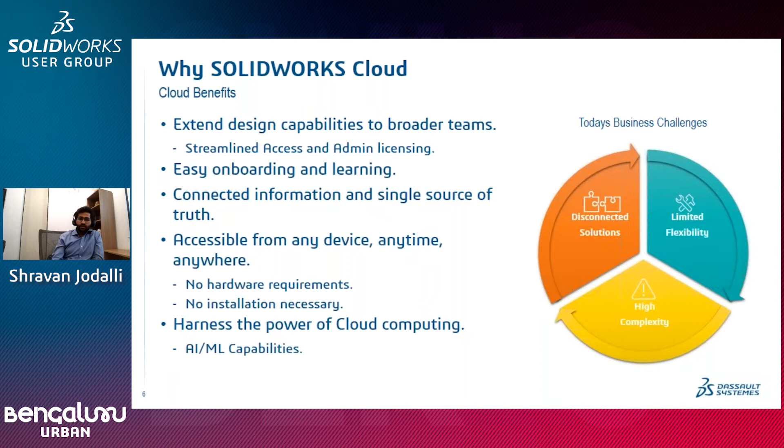So it's connected information and collaboration. Basically, you can use it on your office desktop, your laptop, your phone, your iPad. You're traveling and quickly want to give some approval — in a life cycle stage, somebody has sent you a design to review, so you can quickly go through it and review the design.

All right, let's jump into the demo. We'll look at the different applications that SolidWorks Cloud is offering. First we'll look at SolidWorks part modeling and assembly modeling, and then we'll look at structure modeling, sheet metal and drawings. This is the sea scooter model, where I want to create a battery enclosure. So let's start with the part modeling and assembly modeling.

All right, so this is the user interface. Let me exit the full screen. This is a Chrome browser, or you can use any other browser as well, where I have launched xDesign. So this is the user interface.

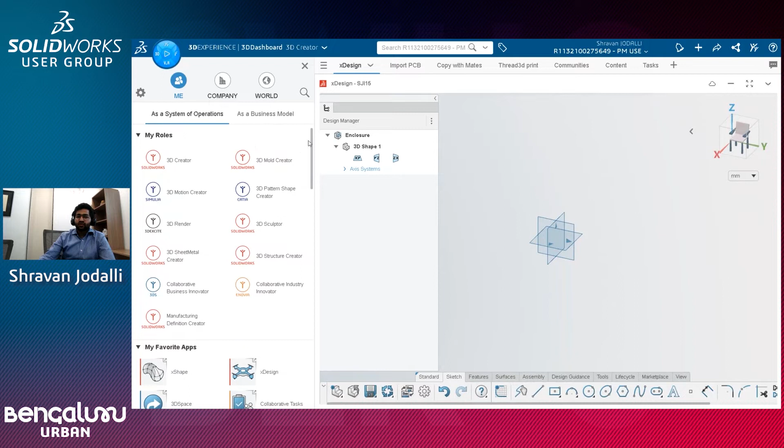You can also do a 3D search, and there's something called dashboards, where you can create your own dashboard. Like, I'm working on XDesign. Now I can add XDesign, drag and drop the application inside the XDesign tab, and based on my requirement I can add different requirements. And I spoke about collaborating.

In a design process, I want to post an idea. I've just created, for example, a community like SWUG Bengaluru event. Here, what I'm trying to showcase is a battery design for this sea scooter. This is my idea, and it can be viewed by everyone in the organization. If somebody likes it, they can change the state to a concept, and then once the design starts happening, you can communicate that in a much better way.

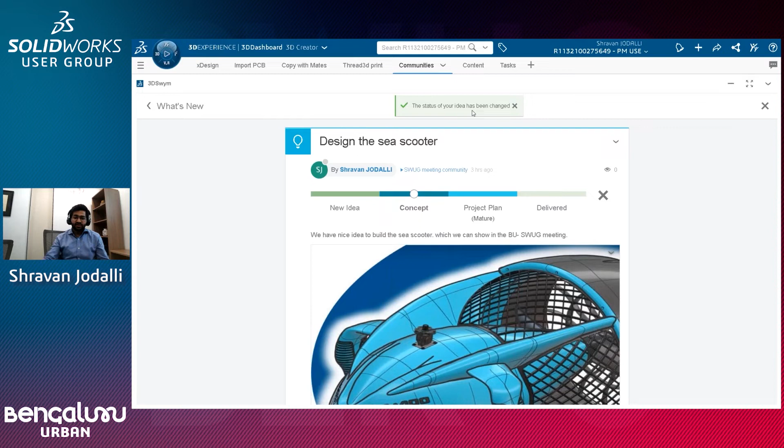These are also customizable - you can use all these applications inside your phone as well. Whatever is recently required, I can add those widgets, drag and drop them from here, and customize my dashboard. It's just showing.

I can also install this as an app, or open it in the browser as well. I can change the state - now it's in the concept state. So if your manager doesn't have a laptop all the time, he can just click on this, add some comments, and make a change. It's that simple.

Even the CAD modeling is all done on the phone. All this data gets saved in the collaborative 3D space, where your data is saved and managed. Your manager, or whoever is managing, can also set tasks. These are all managing applications where you can collaborate with your team.

So I want to create an enclosure design - is it in the to-do state or in work? They can assign it to you, all of this is done, and once it's completed, they can change the state of it.

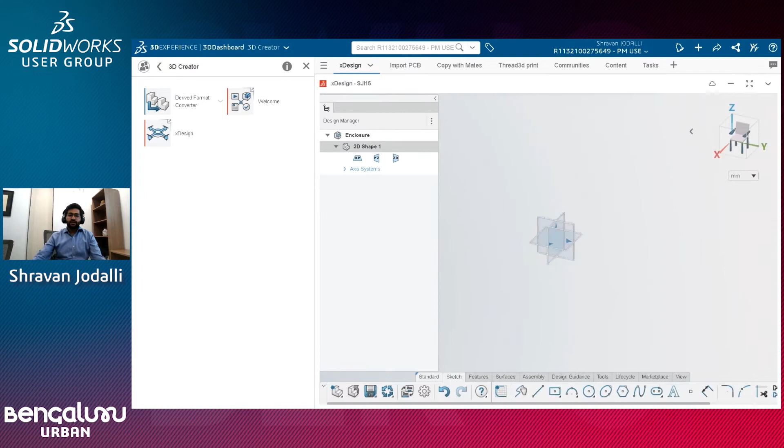Now let's go into the demo part of it. So this is the user interface for the designing, right? Here is my design manager tree, and here are my options. So let's start creating the sketch for the battery enclosure.

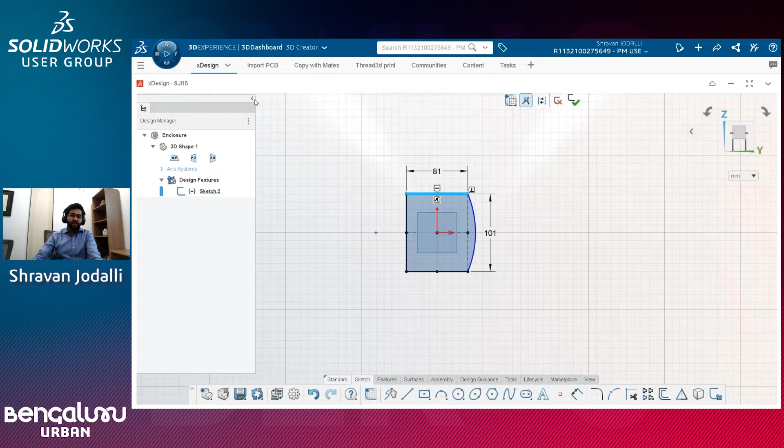When I start the sketch, it automatically activates the dimension, so I don't have to go out of the sketch in order to create dimensions. It's that simple. Editing any of the sketch entities is also very simple - if I want to convert this line into an arc, I can just do it through the context menu. I don't have to go inside the action bar; I can just collapse it. All right, let me do it on the other two sides as well.

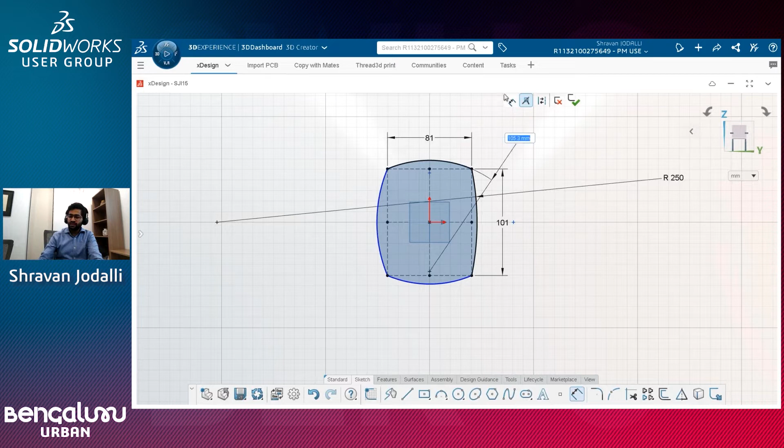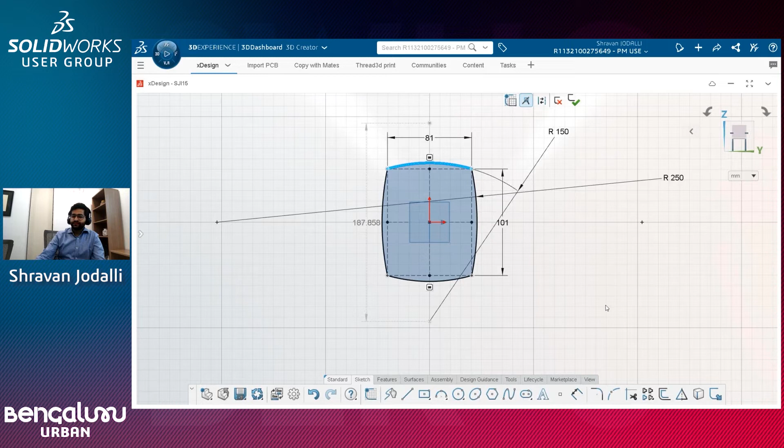Now I have this mouse gesture for the commonly used commands. I need a 250 radius. Commonly used commands can be based on the data, again we have added all those commonly used commands. Now when I select these two arcs, what all relations are possible with them? It will suggest me in the context menu.

So it is very simple and easy to use. I don't have to go out of this designing environment. Let me use the shortcut S key, basically the shortcut keys, where I want to create an extrude. Now I'll add the dimension. That is something which I missed.

Again I use the mouse gesture. Let me add the fillet. So again I have the lasso selection, so I just drag it all around, so I can create a fillet.

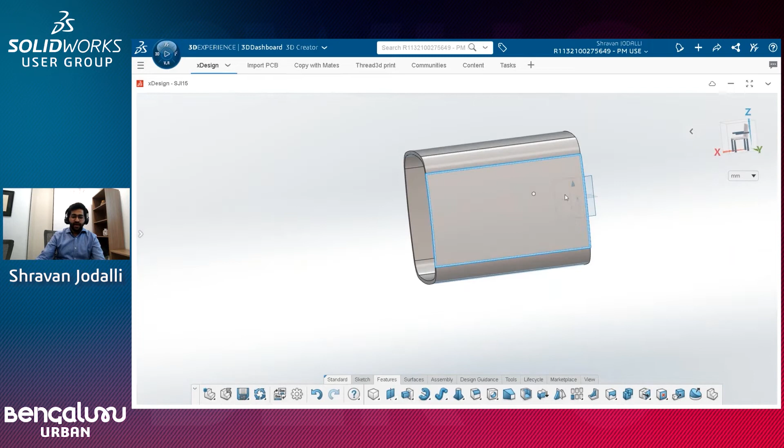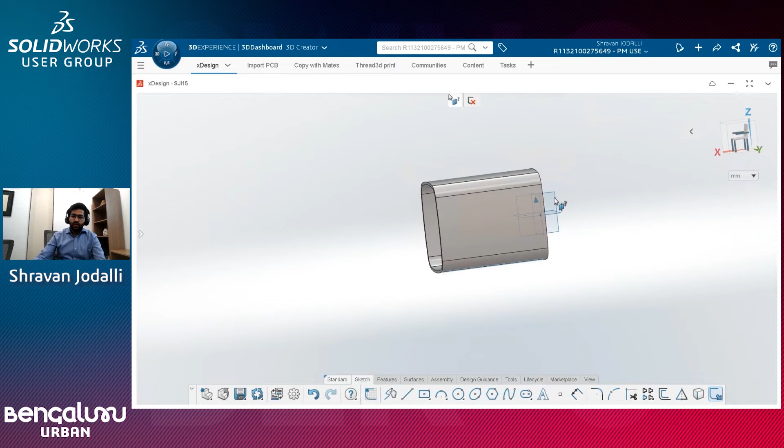Now let me create a shell, and I want the overall boundary of 3 mm thickness. In many designs, like standard libraries, if I'm taking a manifold as a design example, there may be a standard sketch a user might have saved in some particular file, and they want to reuse those sketches in their future design. So we have an option called insert sketch, which allows me to search from my database.

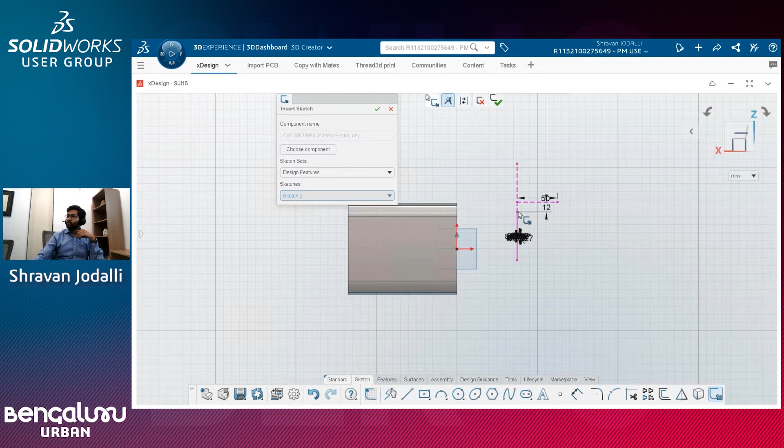And we have a 6W tagger as well, so it allows me to filter out and search the data quickly. So we import the sketch and we can select which sketch we want. We attach it to the mouse cursor, and it can easily snap onto any model vertex or any origin.

I want to insert one more sketch over here. I'll click insert and continue, so I can stay on the same dialog and in one go add more sketches to it. Now I'll click OK, and all the dimensions will also come in. You can see that there are dimensions that have come in. Now if this is a silhouette edge, I can still go ahead and give a collinear relation.

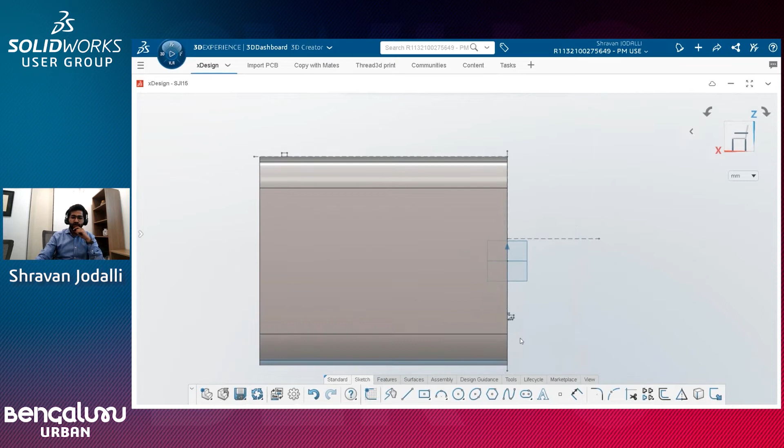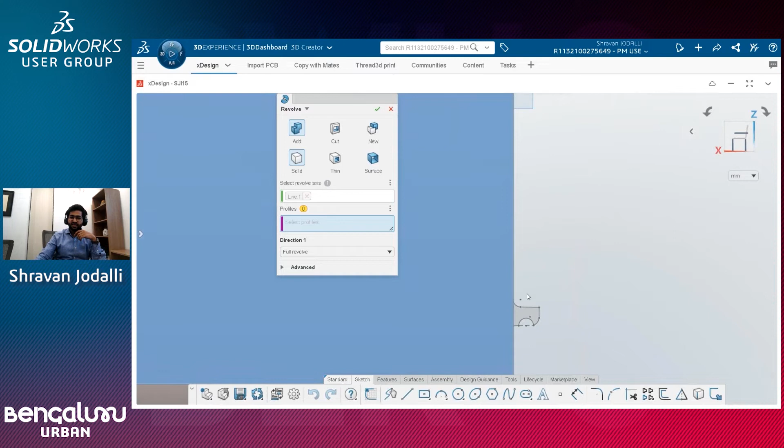I'll come out of the sketch now. In xDesign we call this a super feature. In this feature you can do an extrude, you can do a cutout, and you don't have to come out of this feature to do a revolve. I don't have to cancel out and go to a different feature. If I want to do a revolve, I just select this axis and select the sketch to add a revolve feature, and let me show this sketch here.

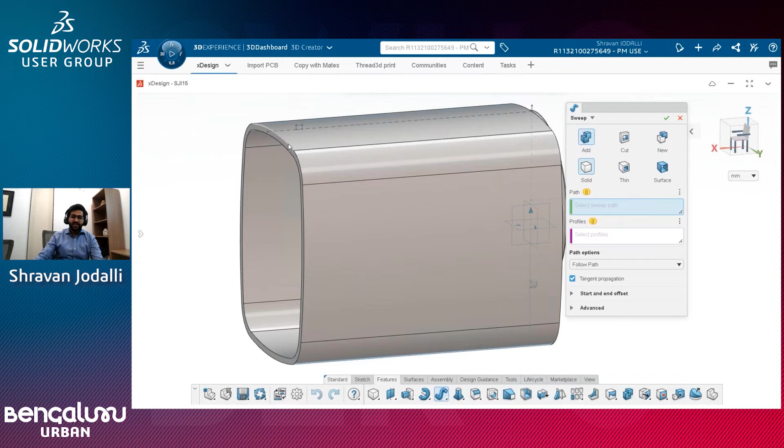Now I want to create a sweep. I need a path, so I want to sweep around the model to add a fixture. When I select that edge, it automatically pops up asking if I want to select the tangential selections around the model, right? So I select that, all the way around, and we were able to easily create the sweep.

Now this is a battery enclosure. In the end I want to mount a PCB, so I need to create some plugs to add the fasteners and the PCB.

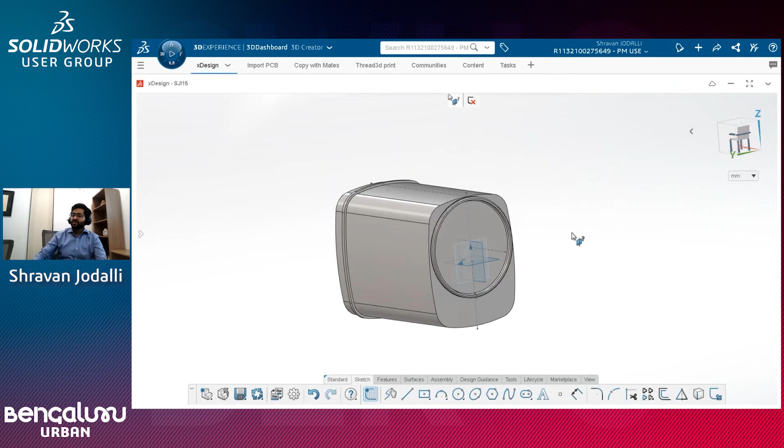Now I want to show you this. Suppose you have started an extrude command, but there is no sketch for you to select. So we have something called command parking. These three dots here, inside this we have a sketch command where you don't have to exit and start the sketch and then come back to extrude. So what we have done is smartly added a sketch command, because extrude needs a sketch to be added. We have added that in the command parking.

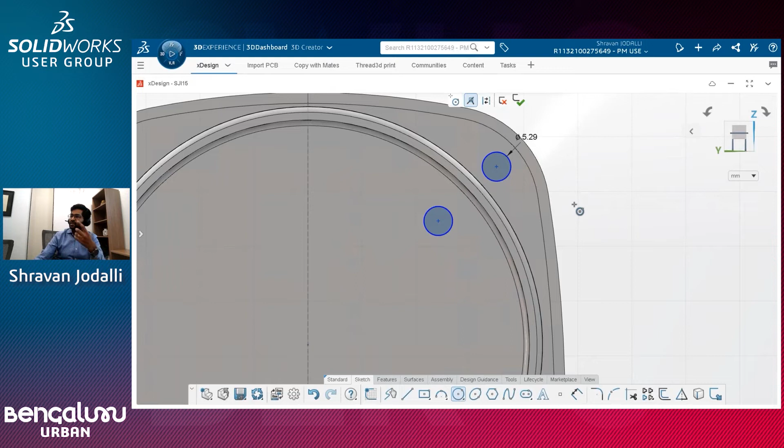So I'll add, and I want to create one more circle here. You can see there's a pink dotted line, and it basically reuses the dimension, the circle which you used from the previous one. So if you're creating repetitive designs with the same dimensions, you don't have to dimension it again and again, it uses the previous value.

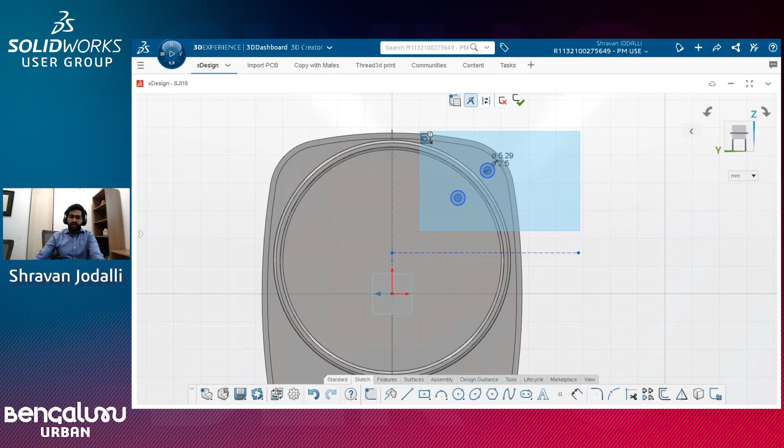Let me do the same thing, 2.5 here. And this we call a mode bar. Basically if I want to have the construction line, again I use the mouse gesture. The reason why I added this horizontal line, I'll tell you in a while. So I want these plug holes on the other side as well. Now this is where we make use of machine learning and artificial intelligence.

So we have something called the design assistance for the sketch.

When I click on that, it will give me the suggestion. The reason why I added this horizontal line was so it will also give me the suggestion on the other side. So do you want to go ahead and add this sketch on the other side as well? Now...

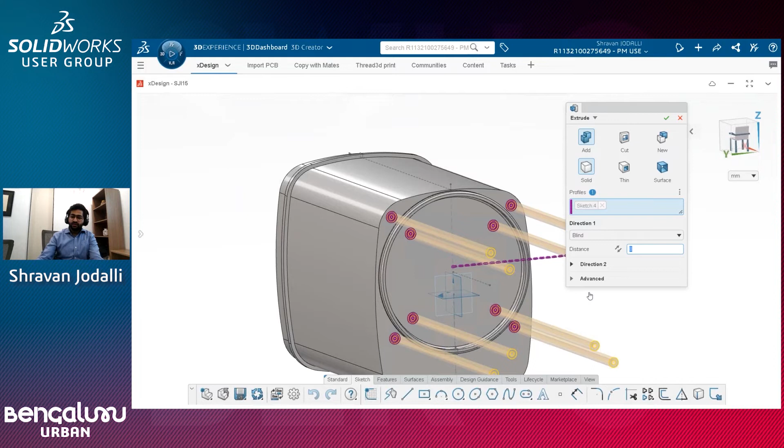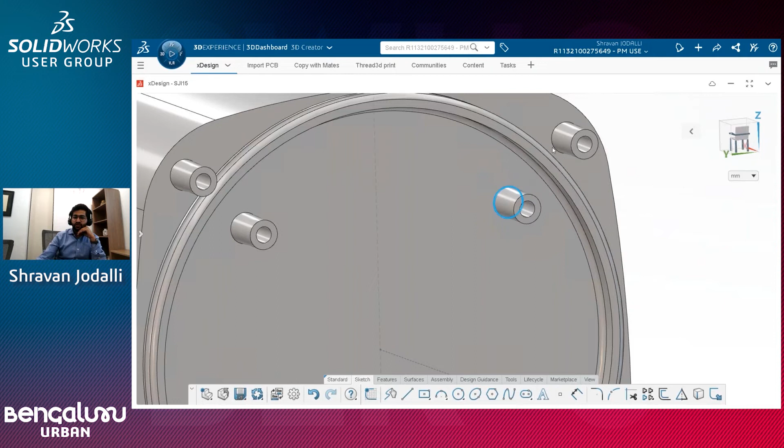I can quickly go and add 1 degree of draft. Again, when I select in the context menu, it gives me all possible options I can apply, so I want to add a fillet. I select this edge as well, and again it's a repetitive selection, so it pops up like a design assistant for selection. It helps me throughout my design process wherever there is a repetitive task, to minimize it as much as possible.

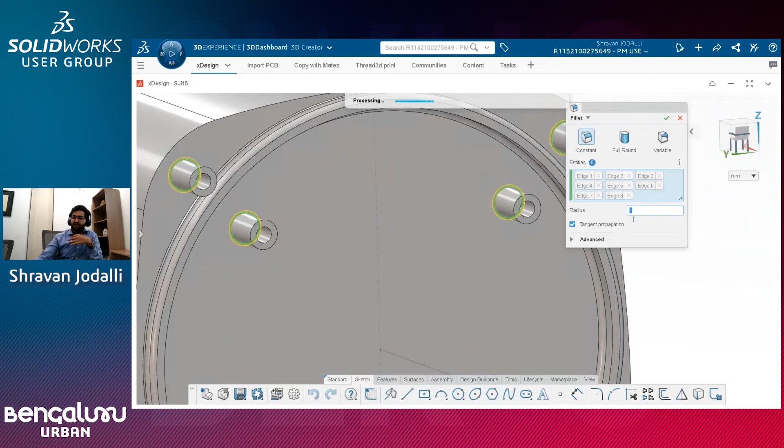So doing all these selections manually is basically a layman's job, going and picking each edge one by one. All this is taken care of by the powerful design assistants that we have.

Also, if I want to add extrude, you don't really need a sketch. You can just select multiple faces and start to add an extrude. I'll add the same thing again. Now I have a more completed version of the X. I've basically added more tabs so this demo goes much further, and you can use it in your own work as well. Let me quickly restore — there's a timeout, that's the reason.

Alright, so as this is available, we can jump into the next step. This is the battery design we did, and there's a motor that has been added to the design. Now there are cases where you cannot do a pattern — basically, some components you cannot pattern. So this I want to add here.

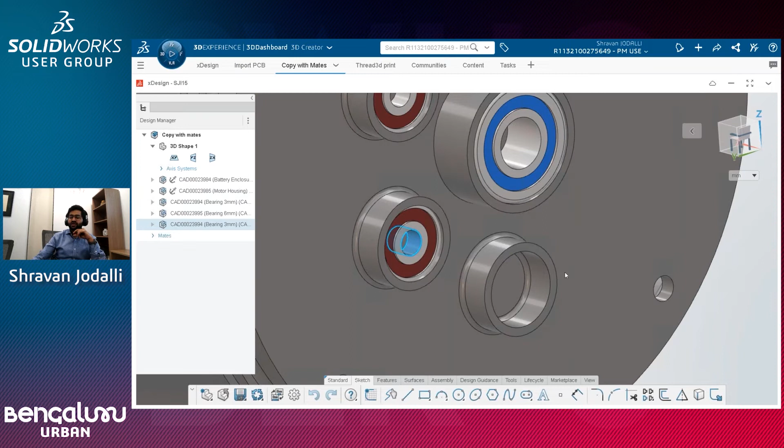Instead of manually going and adding all the assembly mates, let's look at some of the assembly capabilities we have. When I select a component, we have something called copy with mates. This helps me copy this component and add similar mates in a different location where I cannot pattern it because it's positioned differently. So I can reuse it.

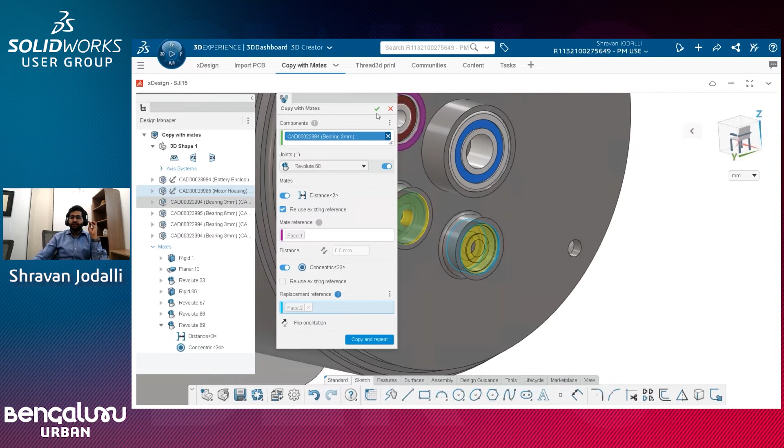It tells me, do you want to add a distance mate for this component? I just want to reuse the same existing reference from the older model. And here I want to select this as a concentric relation. You can repeat this process for other components, so you can easily copy the mates from a different model and add them here.

So now we have this component where I want to... There is an electronics engineer who has done the PCB design, and now I want to integrate it with the MCAD. How will I do it?

We have a capability where you can import IDF 3.0 files, and all these file types are supported — you can import STEP, CAD-CAE files, SolidWorks, ANSYS, IGS, mesh files, Parasolid, and STEP. Now I want to import an IDF file, which is an EMN, BRD, all of that. You can also import the file if you received it from a vendor, either from disk or if it's saved on the 3D drive, you can choose from there as well.

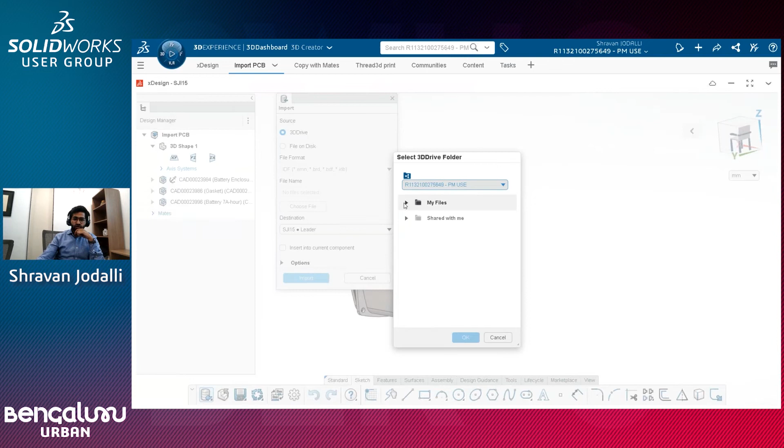I'll pick up the PCB6 EMN file. Automatically, if the file is in the 3D drive, it will also pick up the EMP along with it, which has the information about the height and outline of the component and where exactly it has to be saved.

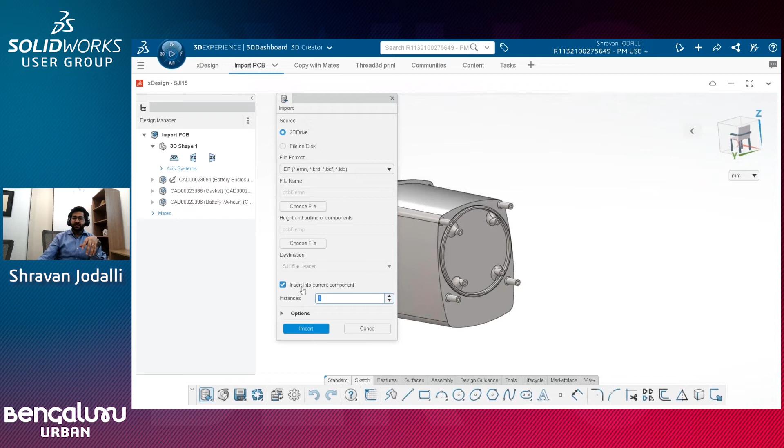There's a common space where all your data is managed. You can select which common space to save this in, and whether you want to import and open the file, or if you're working on some active assembly and want that PCB file inserted into this particular file. It asks how many instances you want to import — I can just check this box, insert into the current component, which will import and insert it into the existing model.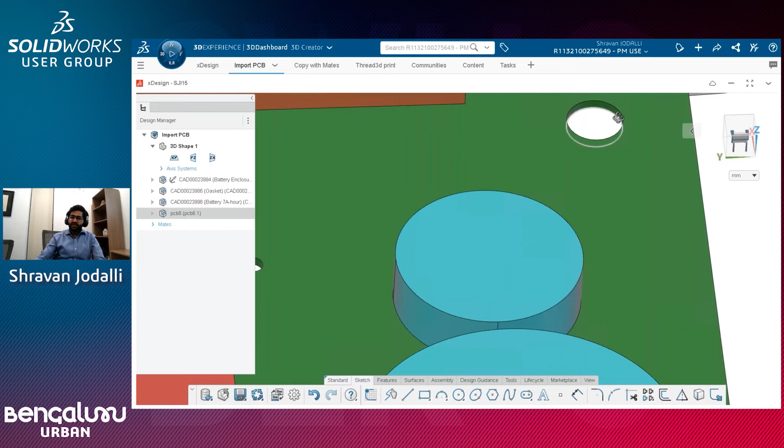So you can see that the PCB file has been imported in this active model itself. I'll just use the robot to pull this out. Again, you can easily add the assembly relations with control select, and it will suggest what all relations are possible.

Possibly you can give it to two circles basically. Now I'm not happy with the orientation of it, so I can click here. I don't have to go into edit, so I can flip the mates that I have given.

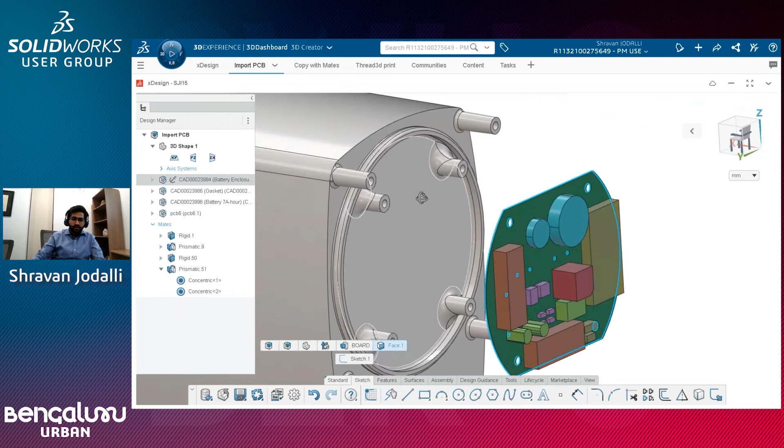Now I want to apply the same concentric relation between this and this. And I want to mount this PCB, this face, with a coincident relation.

So again, in assembly mates, we have gear mates, and there are advanced mates as well available, rack and pinion and cable joint. So all these mates are also available. So even the assembly modeling and the part modeling are pretty much taken care of.

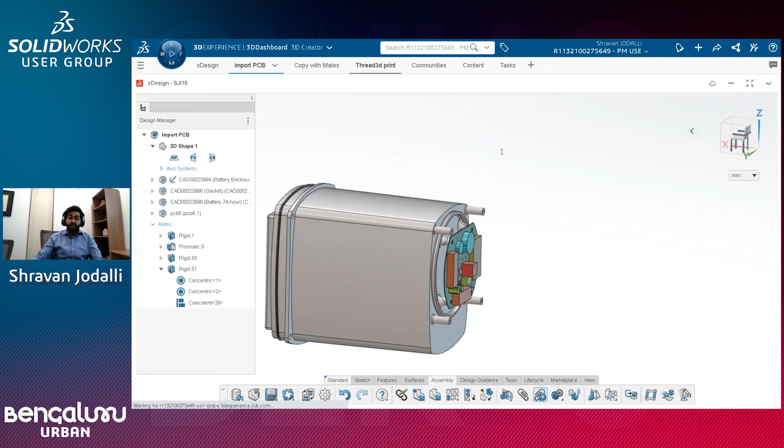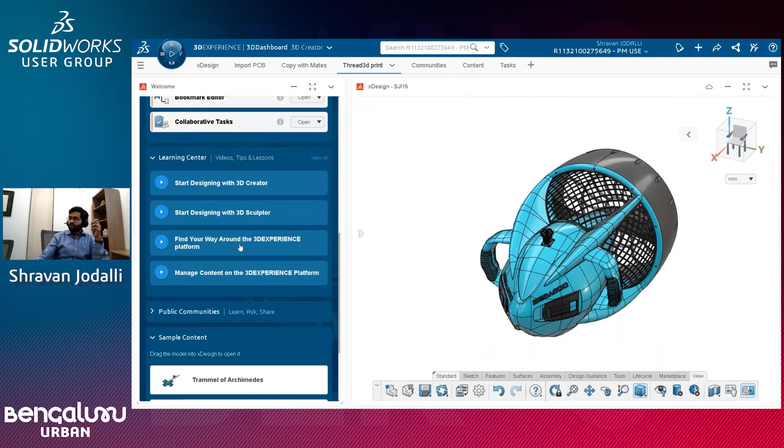I think I forgot to mention the welcome application earlier. There's a welcome application where you can start launching your xDesign from here, where it helps you onboard yourself quickly without any help. There's a learning center, videos available, and models available. You can directly drag and drop these models inside your designing environment and start using it.

All right, so from the battery casing, basically we have assembled. Let me try and change the transparency here. So we have added that battery casing inside. This inside here we have added that casing, whatever we have modeled now. Now there is a camera mount on the top of the model.

Now I want to... let me quickly open this. So I want to do a 3D print of this. Right, so now I want to do a 3D print of it. Now you can see these physical threads as well. I'll show this very quickly.

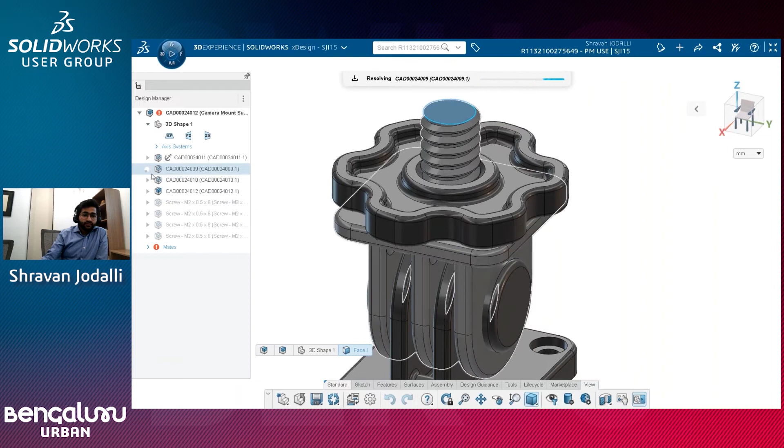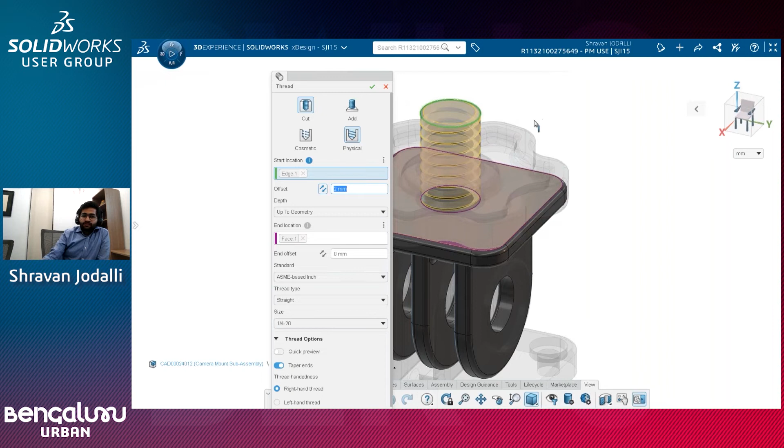All right, so we have a feature where it has all these ASME, DIN, and ISO inbuilt standards, where all that you have to do is select the start and the end face, and based on the standards, select which size you want. Automatically these physical threads will be created. You don't have to manually create the sweep cut and deal with all of the hassle.

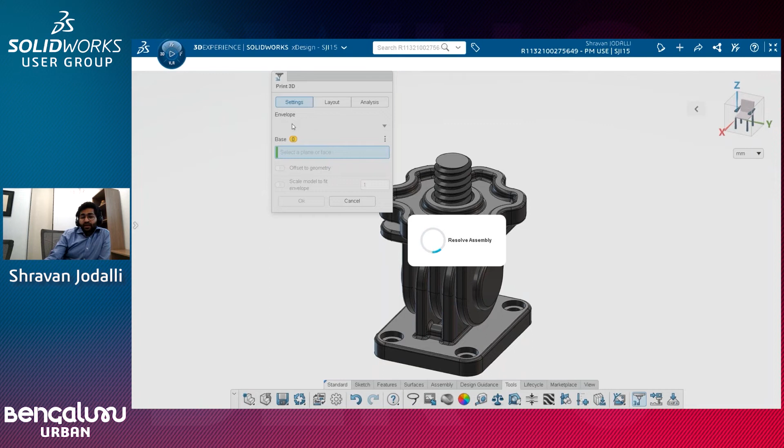So if I want to do a 3D print, in the tools we have an option called Print 3D. You can connect this to your local 3D printer, and all you have to do is select the base, and I can quickly auto arrange. It's an assembly, so I can auto arrange, and you can select a component. If you're not happy with the orientation, you can change the orientation.

And there are analysis tools available to check where you need support. It gives me all this information. Then you can export, and when you click export to a print format, it will basically export it.

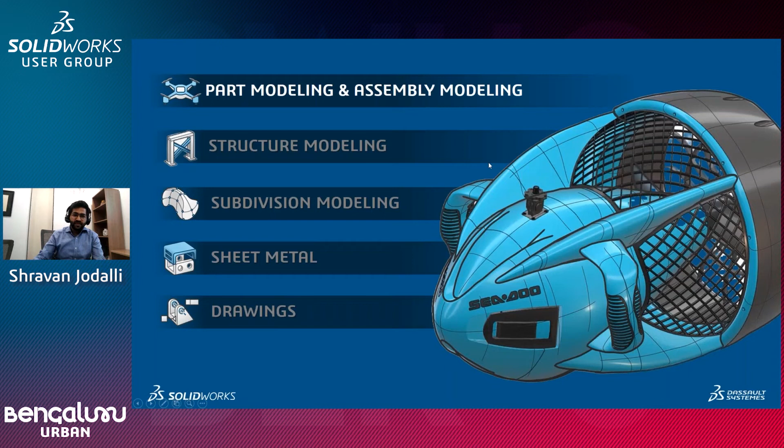All right, so now we saw how easily we can make use of all these powerful AI and machine learning features to make faster designs. And also it is very powerful. It's all in the cloud, and all the data is taken care of in the cloud. It's intuitive, and the user interface is also very powerful. And there's a built-in data management as well.

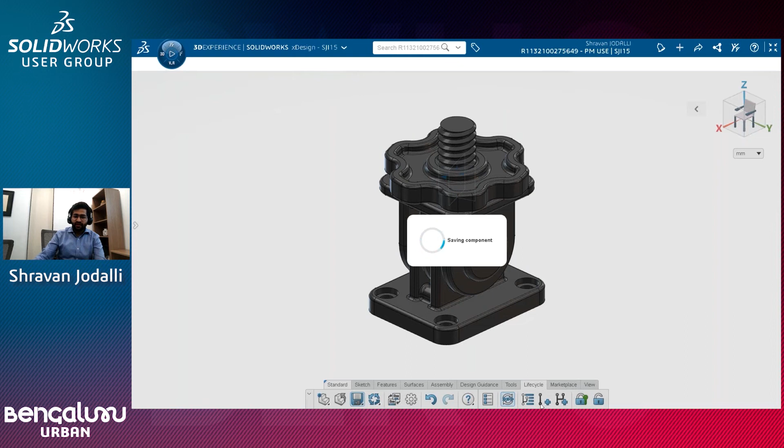Basically there's a life cycle here where you can change your maturity state. Let me quickly show one of it, and you can also change the revision. Once the design is released, if you want to make small changes to it, while you're working on it, you can make it private.

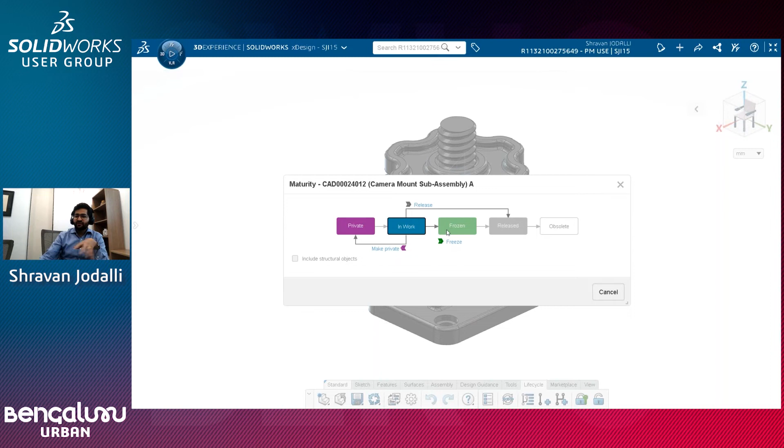You can change the states. This is all PLM - if it is frozen and you send it for approval, and released means it's manufacturing ready. And if it's obsolete, there are all these different maturity states, and there's a revision, a new revision you can create. All of this life cycle can be monitored and controlled.

So next, we'll jump into the structure modeling. We'll quickly do a live demo of the structure modeling, and also for subdivision we have pre-recorded a video. So let's look at it.

All right, so let me restore this as well. The button which I hit, restore, is basically, after some time, if the timeout happens, your data is not lost. When I click on restore, it will basically do an auto save of the data and fetch the latest information of what you've done.

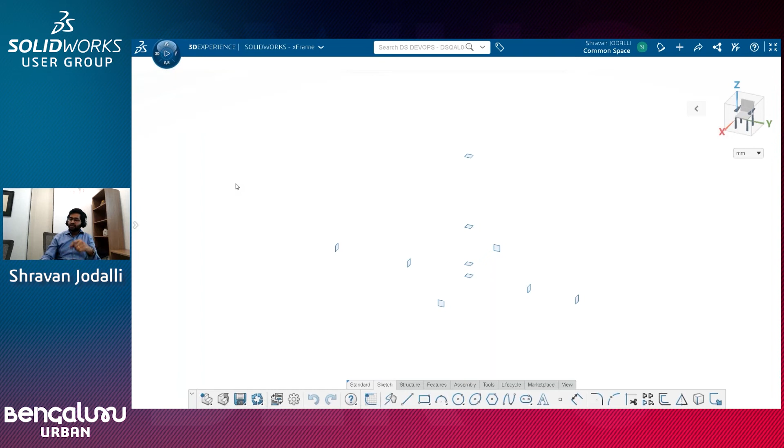So in this case, there's a sorting machine here, and I want to design this machine frame. You can see there are some predefined planes here. Traditionally, how we create these structure members is you create a sketch and then start selecting the sketch entities to create the members.

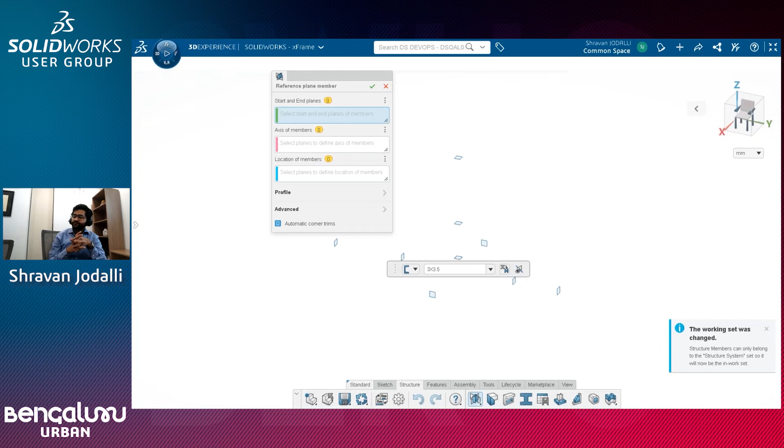So what I'll do is show a different, more powerful way of creating the structure members. If you know the design intent and what has to be created, these tools are very powerful and can be used extensively. So all that I need is planes.

I just need to define which is the start and which is the end plane, which axis is the one where it has to create the member, and the location of the member where it has to be created. In case of structure building and all, it's very powerful. All that you need is planes, and then start picking up these planes, and your model is created.

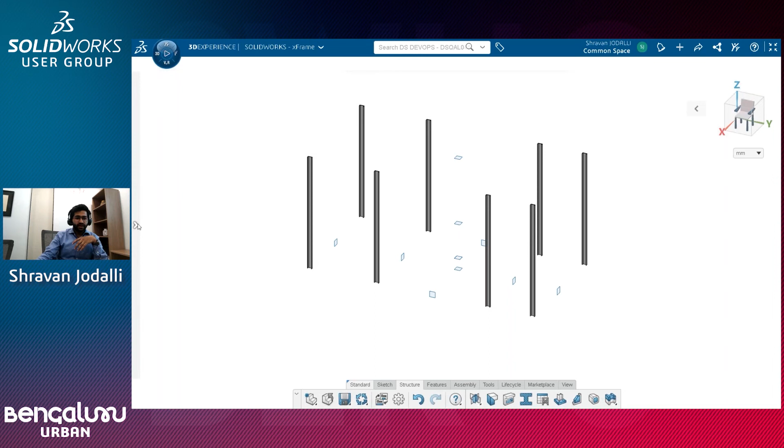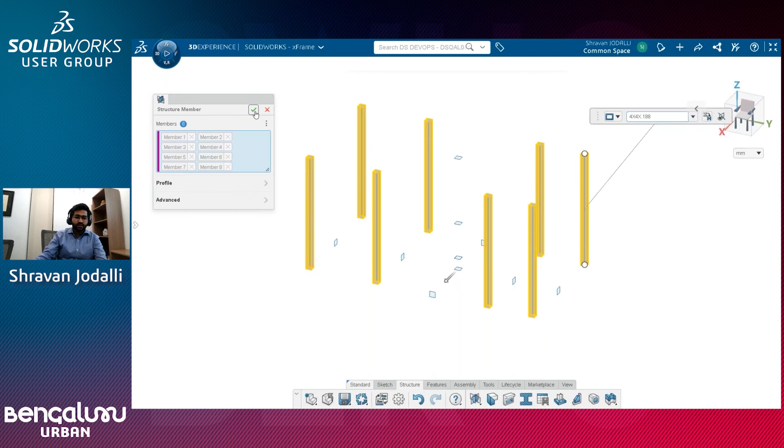Let me quickly edit. This is a flat component where there are some standard profiles that are available, so you can quickly go and search. I wanted to use a different profile in this design. All right, so everything got updated. Click on OK.

Now I want to show a different way of creating the members. I have a continuous selection, which helps me pick up these members in a continuous order. So you can see that if I wanted these members at some distance, this is basically a between member, so I can assign the values.

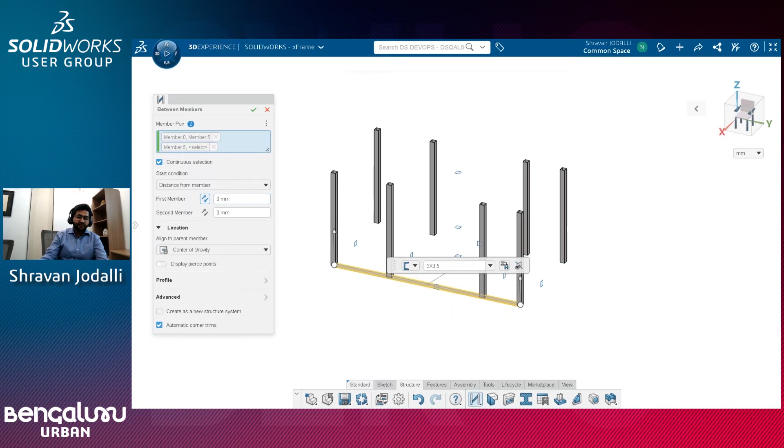Now, in this case, I just want to have these members flipped on the top. I'll start picking up other members using the continuous selection, to complete this loop here. I've completed the loop. On the bottom, you can see there's a checkbox, turned on by default, for automatic corner trims. So what this will do is when I give OK... is everything okay? If somebody pinged in the chat or anything. No, all right, all right.

So you can see that automatically the corner trims are taken care of. It will automatically apply all the corner trims that are required.

Again, for between members, when I launch it, let me turn off... there is an intersecting plane. I can also select a plane where it has to create the member. Let me change it to...

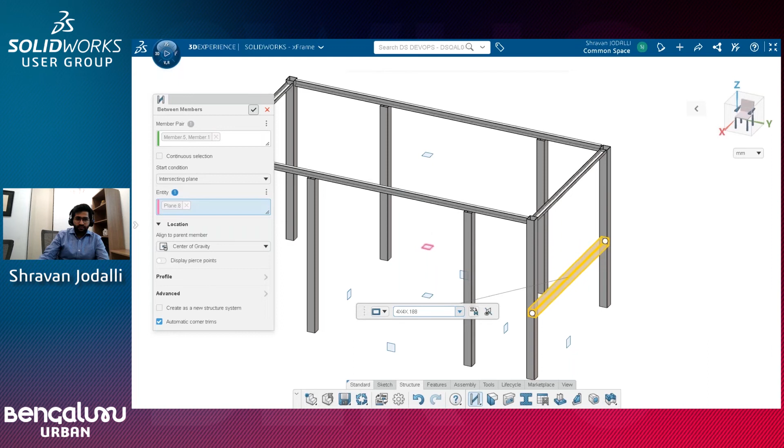Now, these profiles, based on your requirement or your standards, you can also create your own profile libraries. There is a structure section manager where you can create your own standard, select the profiles, and decide which profile you want to create. You can add a material to it so that when you create the members, automatically the material comes in.

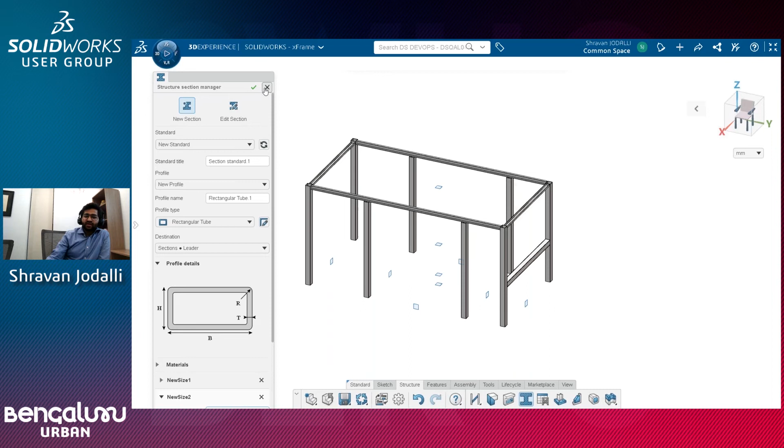So you can add, for example, if I want to create a square section, I can add the height, thickness and breadth values. You can add more and more sizes in one go. This manages it, and also if you want to edit any structure section manager profiles in the future, you can do it.

There's a custom sections option also. You can create your own sketch profiles, like aluminum extrusions and everything, since those are not available with the default library. We have the ISO, ANSI, all those libraries available. So anything outside that, if you want to create, you can create a sketch and do it.

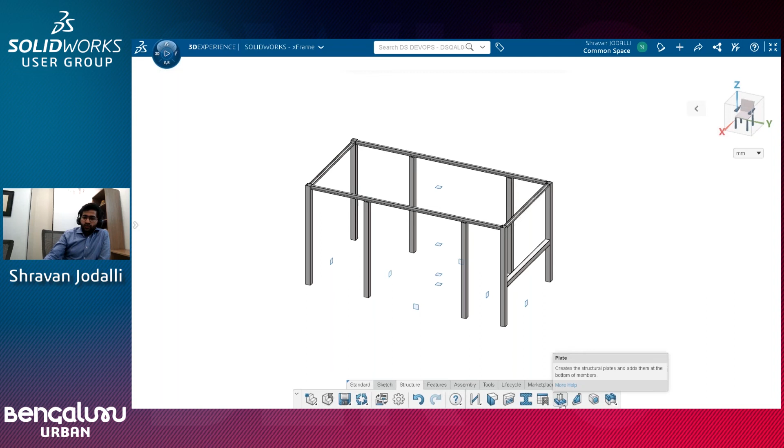I can also select a sketch and start the path segment member. Again, we have machine learning capabilities here - when you select one of the sketch entities, it will give you a suggestion, so I can make use of automatic corner trimming.

We have plates, gussets, and end caps. If there is a supporting plate that I need to add to a frame for support, all I have to do is select the member.

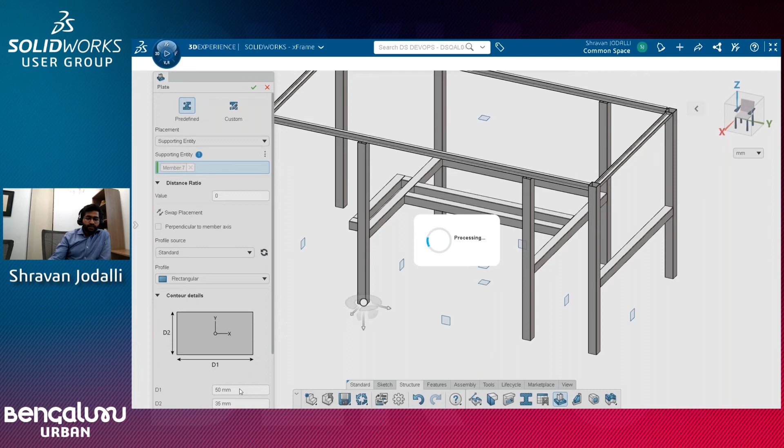What is the dimension? So I need 148 by 178 for the plate. Now I want to create one more plate on this member just for the example's sake.

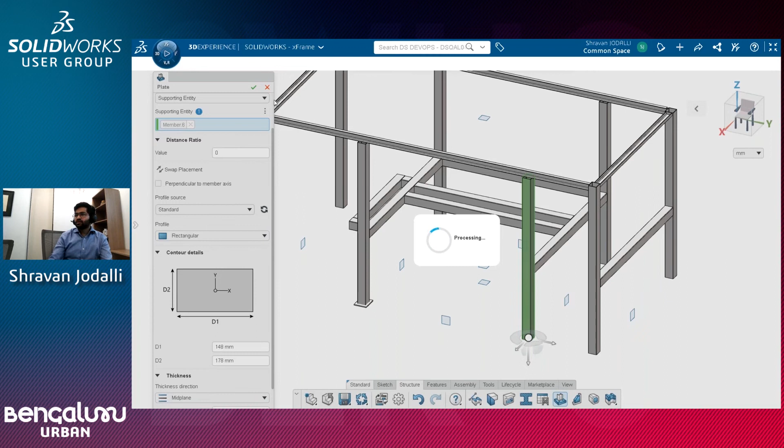It remembers whatever older values you have added, so it remembers all those values.

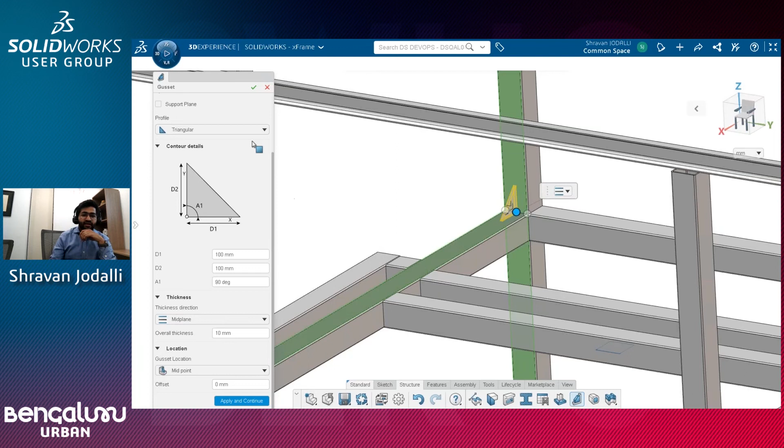For adding material strength to the frame, I can also add gussets. I can select these two faces - whether you want to add this gusset at the center or at the end location, you can toggle between these locations, add a thickness. You can also change the D1, D2 values here, and apply and continue if you want to add more gussets.

Similarly, end caps can also be done. Once your frame is ready, you need manufacturing details of it, so we can quickly generate the cut list table showing how many quantities of this particular member and what the length of each member is.

All that can be created in the browser itself. It automatically generates your manufacturing cut list, automatically creates your corner trims, and we have machine learning capabilities to easily create gussets and caps that add strength to the structure.

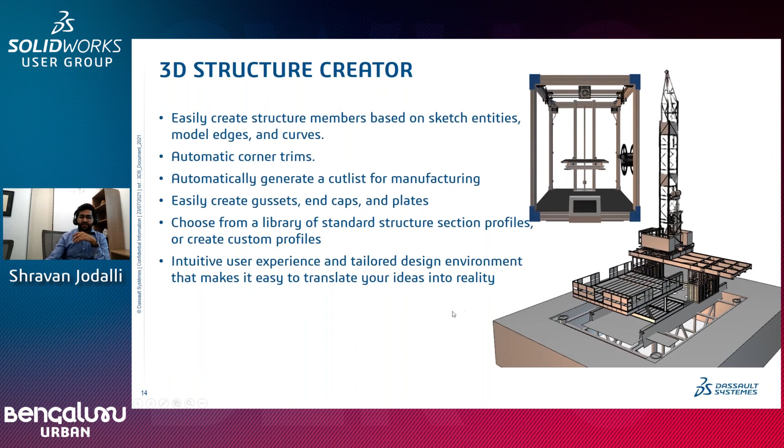Now let's look at some of the subdivision modeling capabilities. There is a 3D Sculptor app with an xShape application, which is basically a polygonal mesh. On the polygonal mesh, we create a high-end surface to get the subdivision modeling.

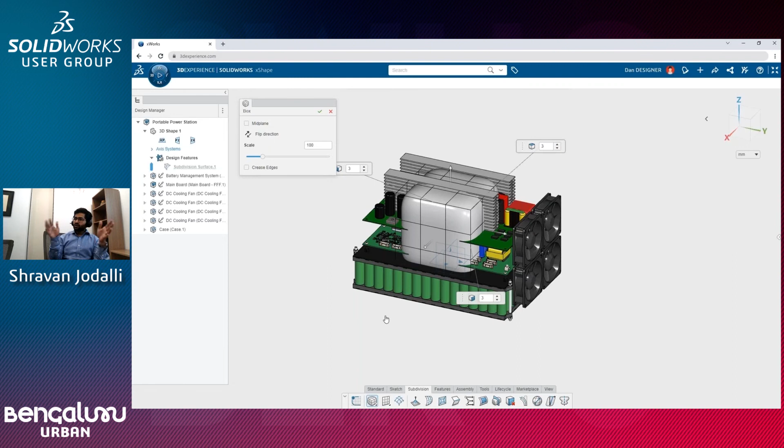Let's create an enclosure for these electronic components. How can we do it? There are standard shapes readily available, so I can just drag and drop them, and if I know the outer bounding box area of the model, I can quickly add those values.

I can scale it according to the bounding box, adding the dimension in the X direction so that it covers all the components inside.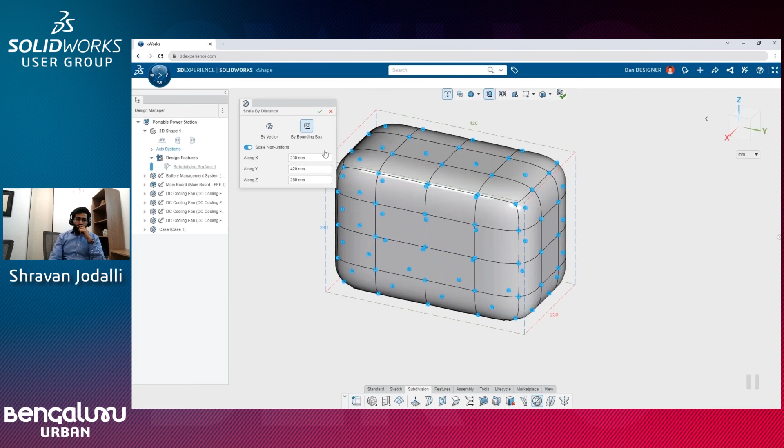It's a very easy push-pull - you can select any vertex and push-pull to change the geometry. This does a crease where you want things flattened, like when you want to keep it on a floor, where you can quickly crease those faces, and push-pull to adjust the size.

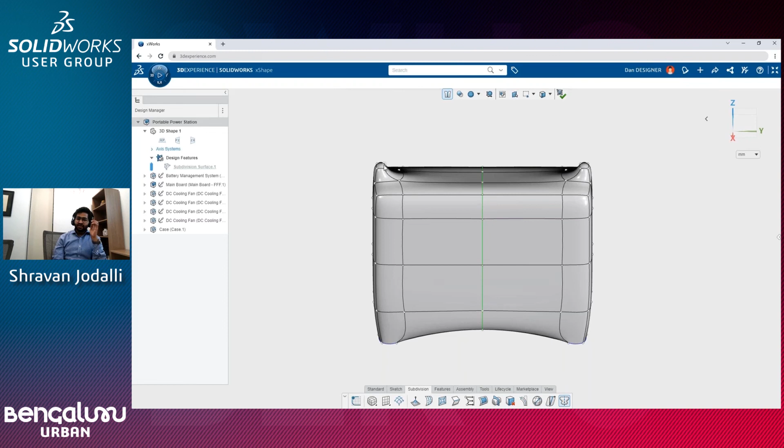Any face that you select, you can extrude. This is very much organic kind of modeling, where you don't need real expertise in surface modeling - it's largely push and pull, and how creative you are.

I can connect these two extrudes, and increase or decrease the dimension - I can revolve, I can translate.

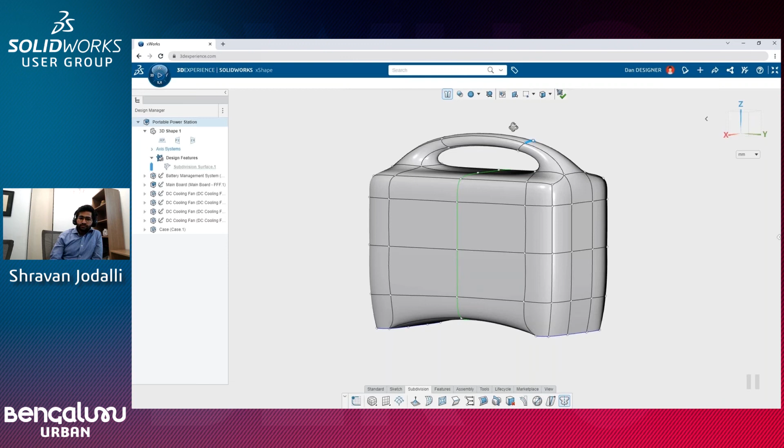Once this is done, I can easily subdivide all those faces. I'll use push and pull so it doesn't interfere with the internal components. Once that's done, since it's a polygonal mesh, we can knit all the mesh elements.

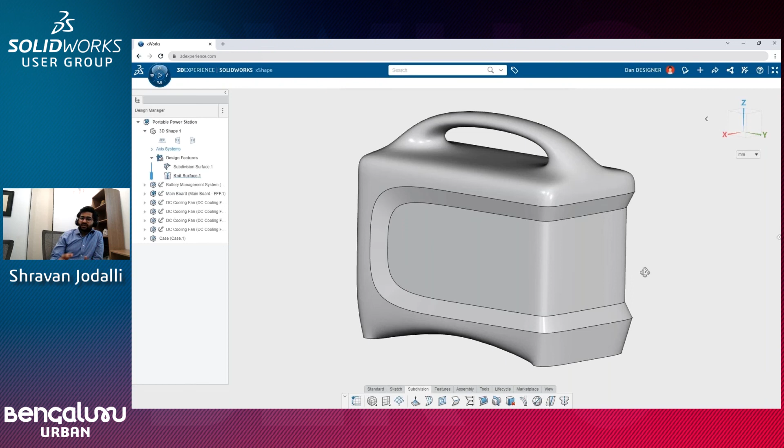In the previous part you saw the polygon mesh, so you can easily create a surface from it. This 3D Sculptor or xShape capability is not available in the SolidWorks desktop version.

Users can make use of the xShape and subdivision modeling, and integrate it very seamlessly - you can open these files inside SolidWorks desktop, you don't have to export and import it back in a graphical way.

There is a data transition that happens very seamlessly, and it also enables collaboration in an organization where there is an industrial designer and a mechanical engineer, because it is a single source of truth, and you can switch between the applications.

So I am modeling something here. Now I want to go and add something inside X design - whatever rules you have for something from X shape, I can quickly switch between the applications.

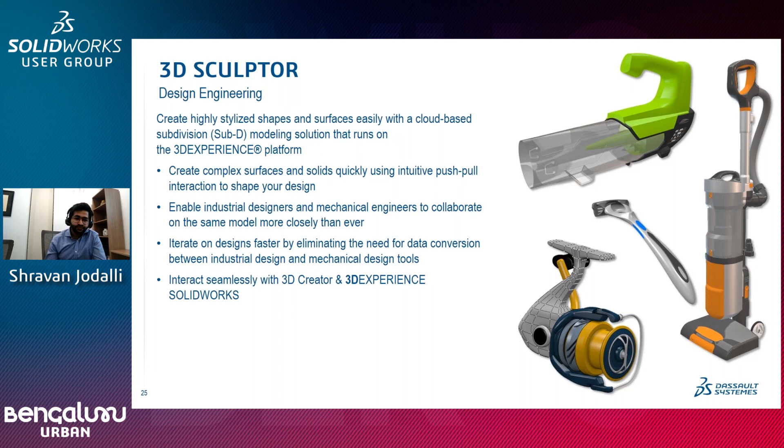Let's look at the X sheet metal quickly. Again, we are dealing with a lot of enclosure designing today. I want to create an enclosure for this PCB, and sheet metal is largely used in this area. In context of the assembly, you can start building your design.

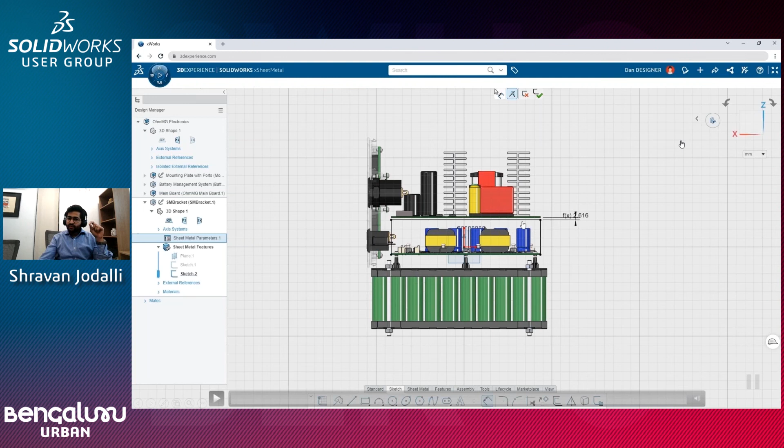You can see on the left hand side, this is the design tree basically in an assembly environment. So I can start the sketch, and I can also make use of equations. Based on the thickness and the bend radius, you want to have a specific offset maintained from the next PCB. That can be added as an equation, so any change or update in the design will be taken care of.

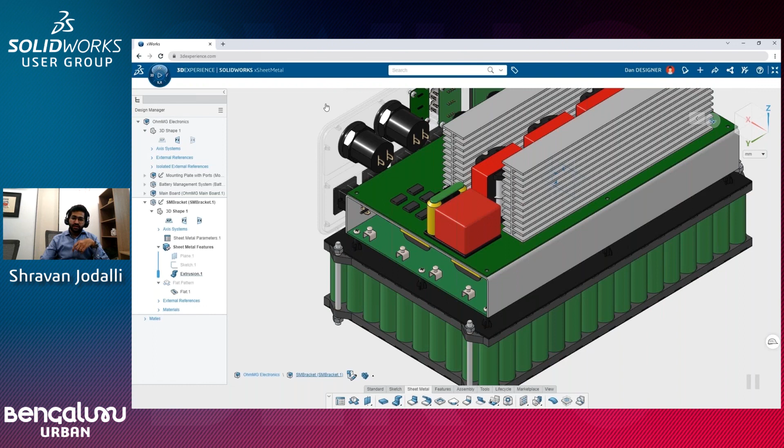Now we can quickly add the material, and I can quickly extrude it. All the corners, based on your initial details of the sheet metal, have been applied automatically. Just by selecting the edge, I can pull it.

So here you can start adding the edge flanges. There are different settings, like whether it has to be from the outer side and what the angle is. All of these details can be quickly added, along with offset. Now, visually, you can see that there is an interference that has happened here.

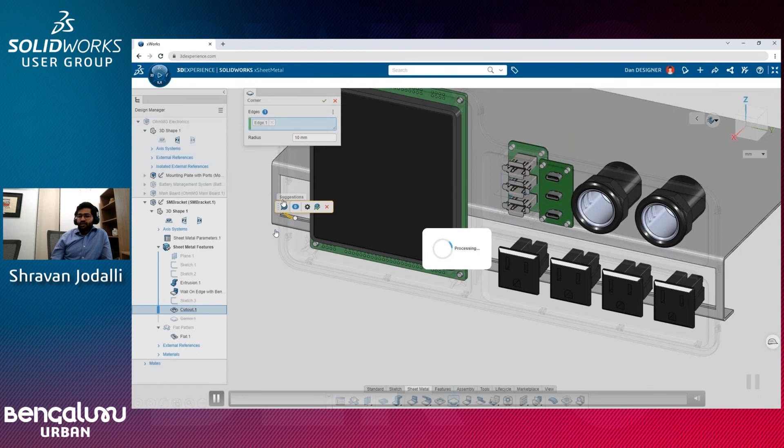Now I want to create a cutout. I can just create a sketch, select it, and create a cutout. Now there are sharp edges here, so I want to create the corners. When I select the corner, the selections are made quick and easy with machine learning, which will suggest the other three corners if you want to go ahead and select them.

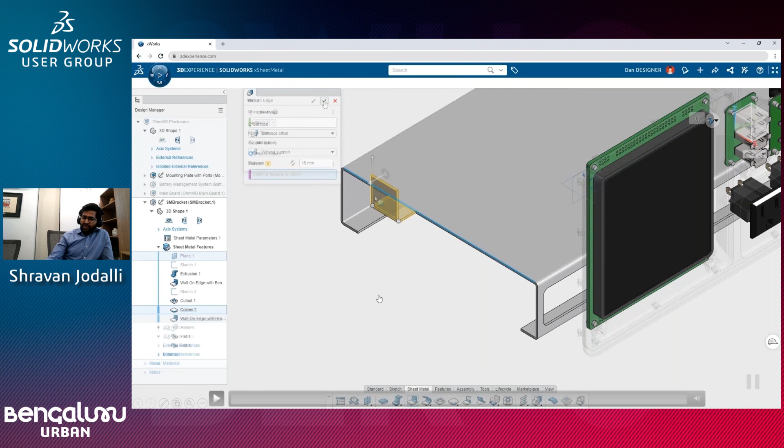Again, on-screen toggles, basically manipulators, let you quickly modify the design. And if there is any repetitive work, in terms of mirroring that you want to do, you can quickly use the mirror or linear pattern feature to add these functionalities. I can also add a mate in context.

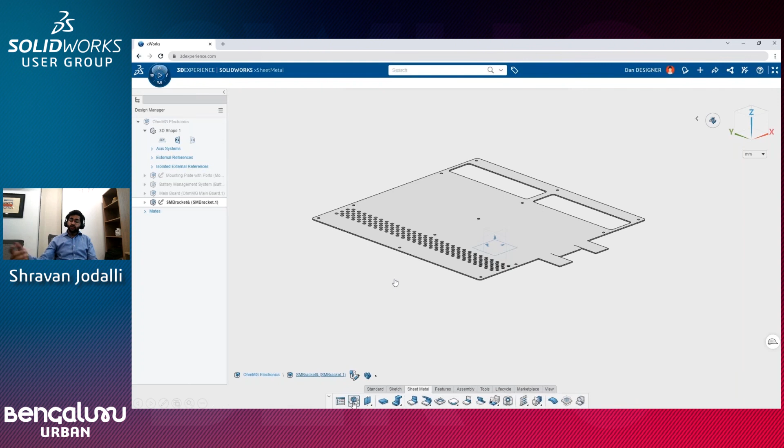Once the sheet metal is done, I can activate this. All that I need is, once the sheet metal design is done, I need to flatten it to see what the bounding box is, for the machining to be done. And if you want to send this flattened detail for manufacturing, you can also export right away to a DXF output, which is a machine readable output for any sheet metal design.

So we saw a lot of designs that have been done. Ultimately that has to be documented, basically creating drawings to be able to manufacture. You can create a 3D view itself and add all your dimensions there. It is also called model-based definition.

This is paperless manufacturing, where you create all your drawings in the 3D design itself, and beside the machine you have a tab where you can see all the dimensions and everything. They can rotate the model and see it. So all those capabilities exist, and we also have the 2D drawing layout.

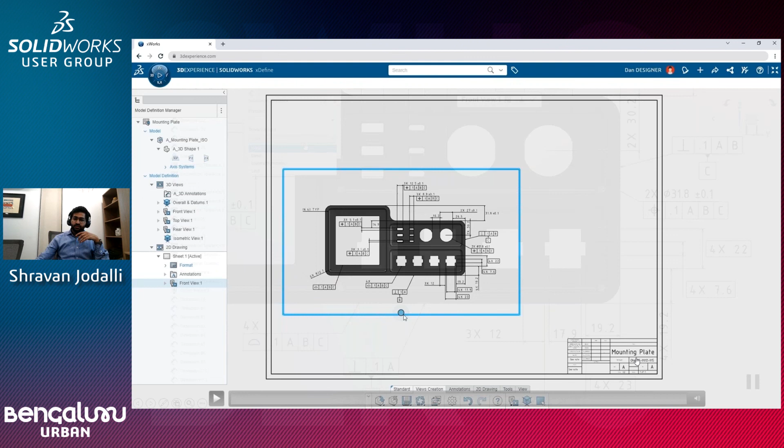Once you have added all the dimensions, you can just drag and drop them inside your 2D drawing sheet, and you can create your own template. All of that can be done. I can drop in multiple top views based on your view, and you can add customizable notes as well for manufacturing. In terms of communication, this drawing can be opened in the 3DPlay.

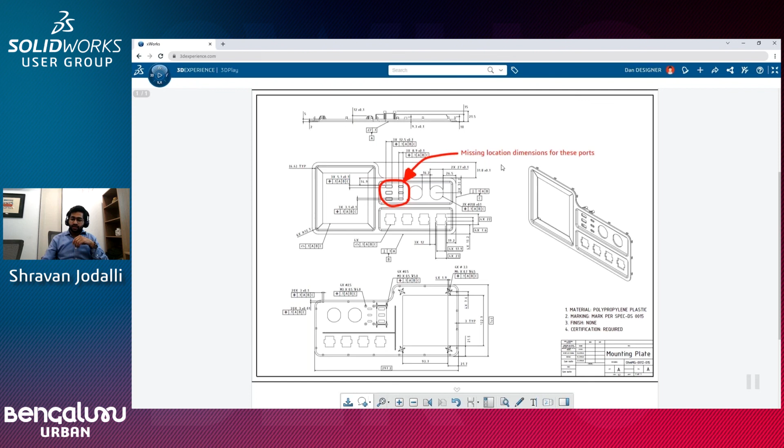If you have sent it for review, they can add a comment saying there's a dimension for these ports missing. They can notify the user, and then they can go ahead and modify these things.